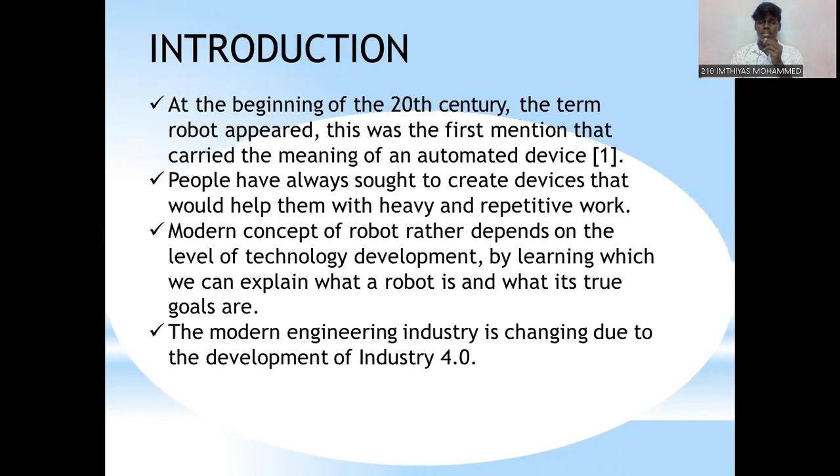The modern engineering industry is changing due to the development of Industry 4.0, and modern robotics production has moved beyond separate work areas and started working together with humans. There is a new type of robot, collaborative robots, that can work side by side with a human, performing not only sequential tasks but also parallel ones. Cobots have the following characteristics: ability to interact safely with a human, risk reduction in task implementation, and flexibility with learning possibility for wide use and quick adjustment. Through the integration of collaborative robotics in production, it becomes possible to advance from coexistence to collaboration between workers and robots.

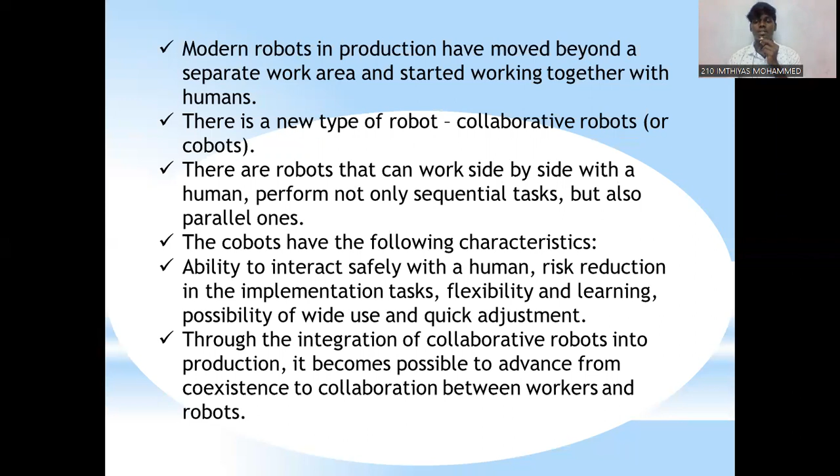In this slide, we see the robotic classification. First of all, there are two types of classification: service and industrial. The service type is personal, professional, and industrial professional. The two in collaboration are called collaborative robots.

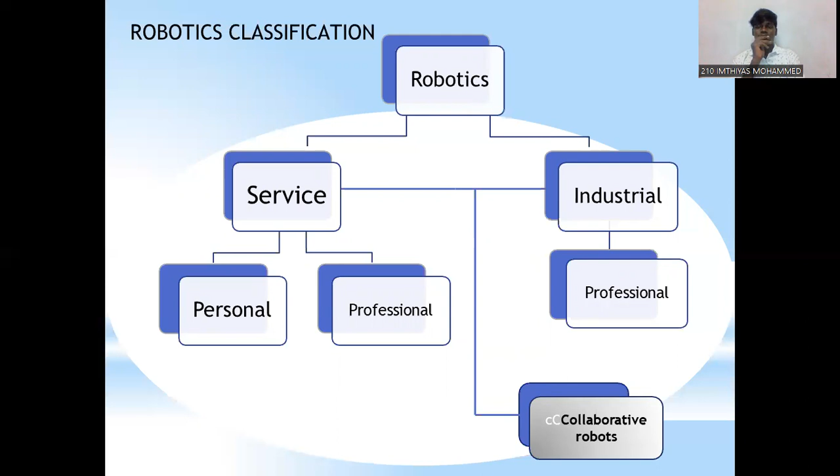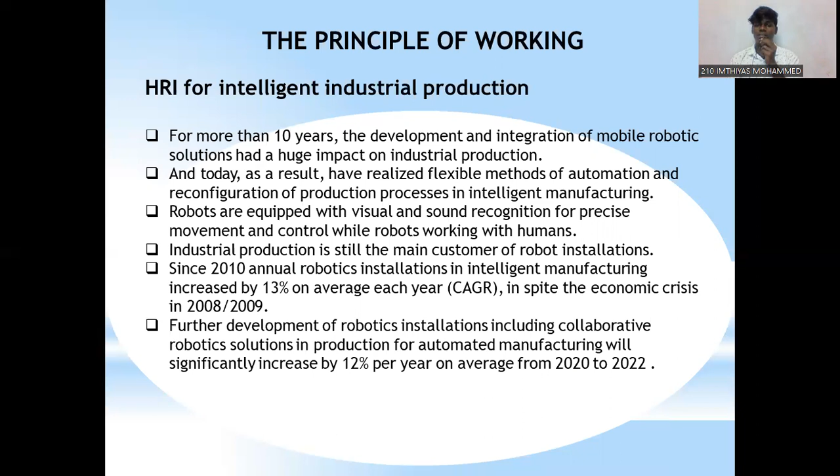Then HRI for intelligent industrial production. For more than 10 years, the development and integration of mobile robotics solutions has had a huge impact on industrial production. Today, as a result, we have a flexible method of automation and reconfiguration of production processes in intelligent manufacturing. Robots are equipped with visual and sound recognition for precise movement and control while working with humans. In further development, robotic installations including collaborative robotics and solutions in production for automated manufacturing will significantly increase by 12% per year.

Next, collaborative robot safety oriented method during HRC. This section describes safety in HRC, with examples such as robot and human in the field of rehabilitation, human and autonomous vehicle on the road, child and robot during study, manipulator, and human worker in a robotic lane in production.

There are two ways to reach safe interaction between robots and humans. First, changing the robot configuration so that it does not cause any harm when it collides with humans, which is basically hardware design. Second is to make a collaborative robot based on safety standards and software design.

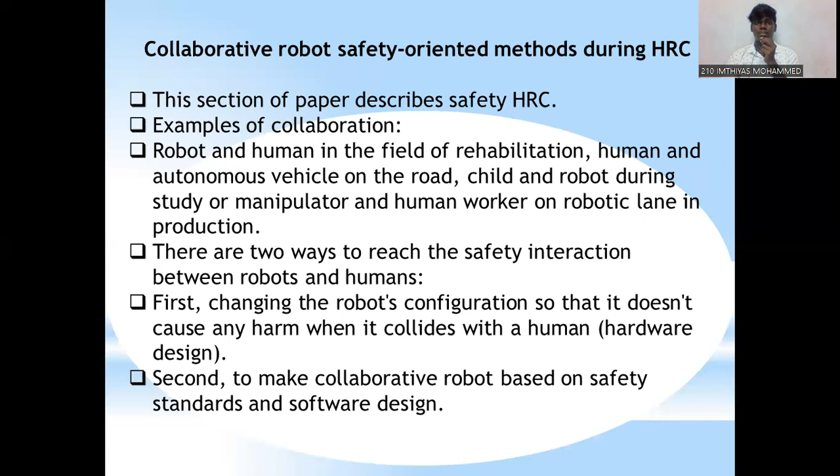Consider a multi-agent system, where each element is defined as a robot agent or human agent. For safe and effective interaction between a human and robot, it is advisable to use the method for solving tasks in game theory, with active agents whose actions are mutually determined in relation to each other. The goal is designed to find the bounds of robotic action which are safe for the human and back reaction, and to maximize the robot's utility or minimize the robot's cost within those bounds.

There are three main factors important to cobots. First, improving the economic efficiency of robots in relation to human labor. Next, introduction of technical advantages in robotic solutions which will allow effective implementation of robots in key industry and economy. Another one is the rapid development of the robotic market.

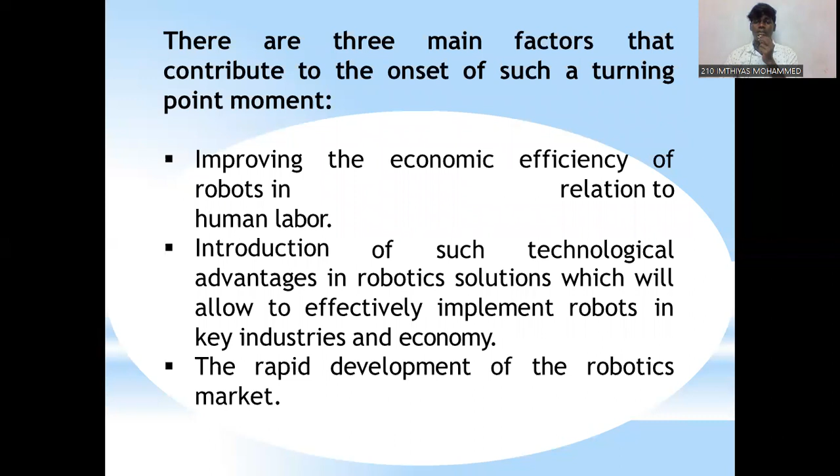The collaborative implementation examples show that automation and implementation of HRCs in series production is a major step toward future intelligent manufacturing. It becomes cheaper, more flexible, and efficient. One of the unique opportunities of cobots is the cognitive ability to take decisions independently.

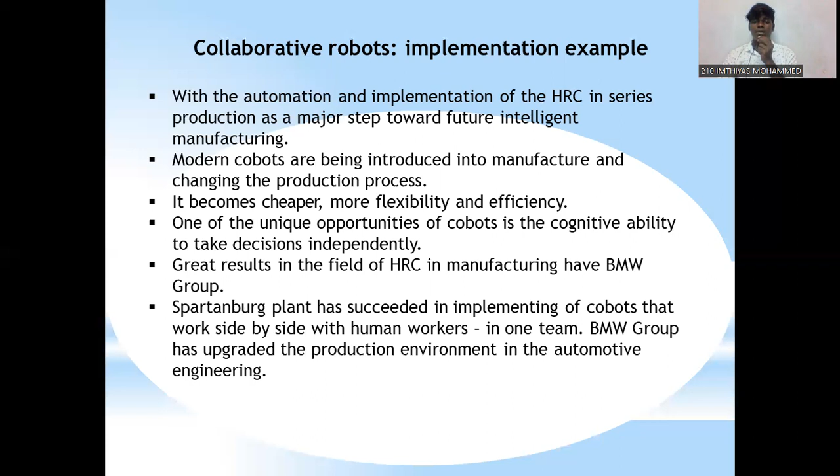Great results in the field of HRC in manufacturing have come from BMW Group. Their Spartanburg plant has succeeded in implementing cobots that work side by side with human workers. BMW Group has upgraded the production environment in automotive engineering, allowing human operators to use their cognitive abilities to maximum effect. Human operators can work together with robots without productive difference, improving efficiency and effectiveness at the workplace, with more room for creativity.

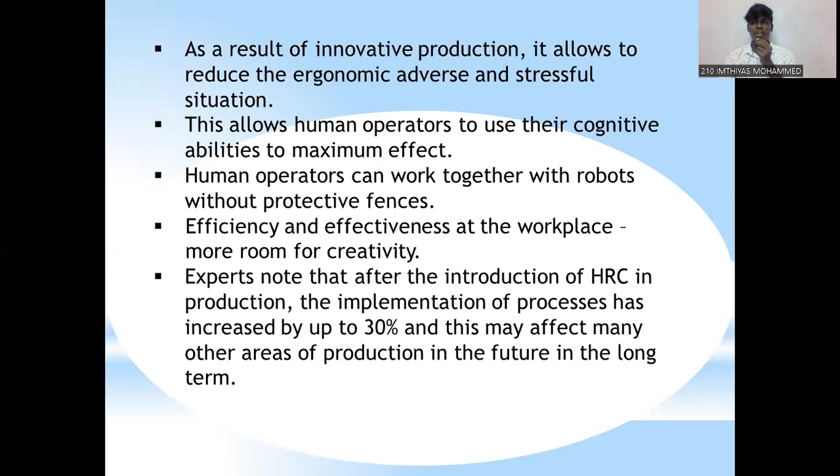The main human factors during HRC are displayed as follows. First, the credibility of the robots - the lack of confidential relation with robots and the attitudes toward them contribute to reduction in their use.

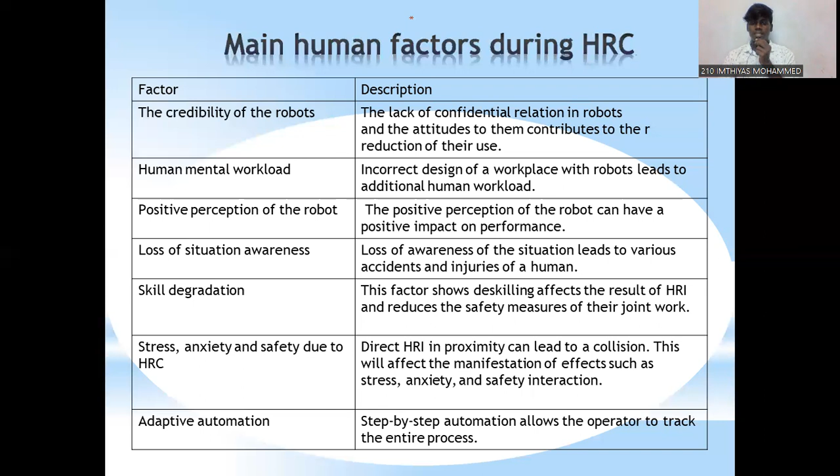And human mental workload - the incorrect design of the workplace with robots leads to additional human workload. Positive perception of the robot can have a positive impact on performance. The loss of awareness of the situation leads to various accidents and injuries of a human. Skill degradation affects the result of HRI and reduces the safety measures of joint work. And adaptive automation - the step-by-step automation allows the operator to track the entire process.

This is the Cobot robot. There are many applications of the Cobot robot, including assembly, dispensing, finishing, machine tending, material handling, welding, material removal, quality inspection, and more.

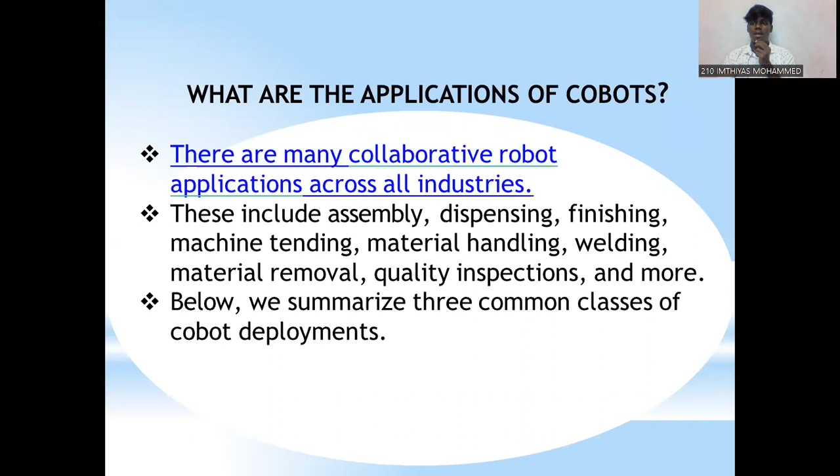Below we summarize three common classes of Cobot deployments. Material handling is one of the most dangerous jobs in manufacturing. Materials such as metal, plastic, and other substances can pose a great risk to human workers. Additionally, many material handling tasks are repetitive, which can give rise to repetitive strain injury. Industries that use robots in manufacturing see significantly fewer workplace injuries.

Meanwhile, machine tending tasks, including those that involve heavy duty CNC machines, are also within the capabilities of Universal Robots' cobots.

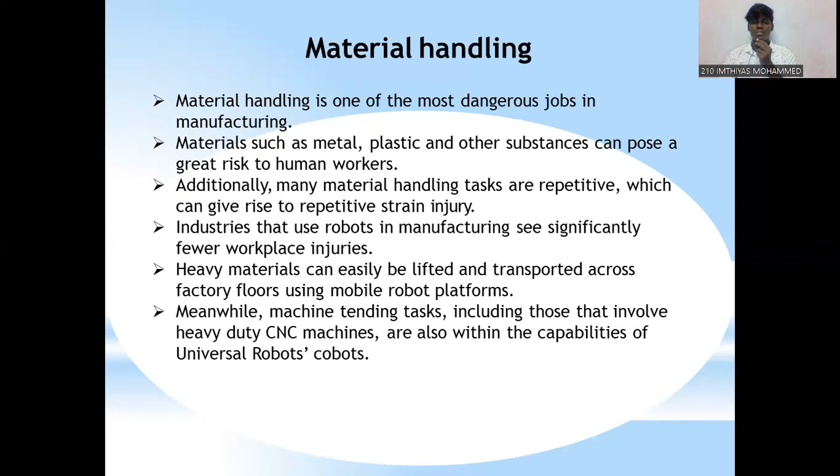For assembly and quality assurance, Universal Robots' cobots are specifically designed to work alongside human employees and relieve them from tedious and difficult assembly jobs. This includes welding small pieces together, drilling screws, and similar assembly tasks. Cobots can also be used to assist with quality assurance during the production process.

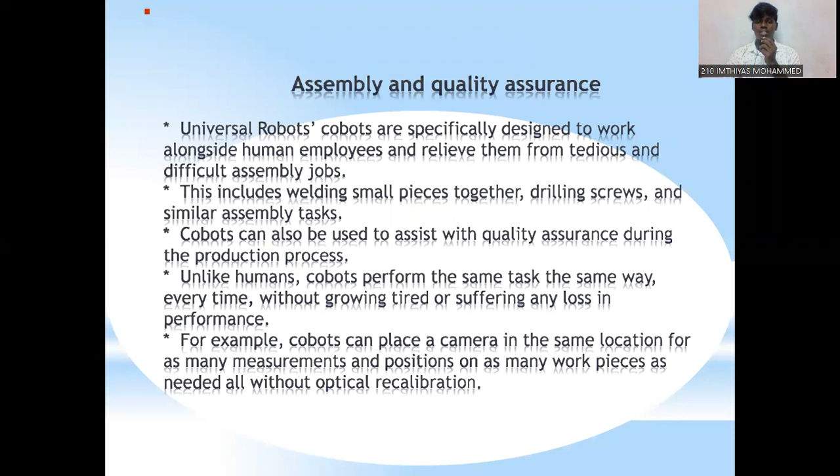Unlike humans, cobots perform the same task the same way every time without growing tired or suffering any loss in performance. For example, a cobot can place a camera in the same location for as many measurements and positions on as many workpieces as needed, all without optical recalibration.

Next, material removal. Other production tasks can also be handled by cobots. Material removal by robots is needed for any process involving filling molds. Small robots can assess the molded piece and take care of trimming any excess metal or plastic without damaging the part or subjecting human workers to the risk of injury.

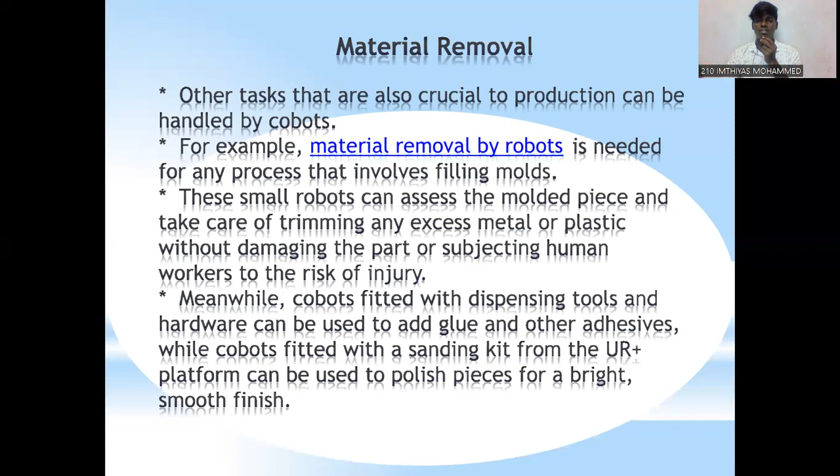Some common uses of robotic technology include electrical and electronics, food and agriculture, and pharmaceuticals and chemicals. In electrical technologies, universal robots are used in manufacturing of lighting, mobile phones, speakers, computers, and more useful works.

Collaborative robots are easier to program than typical industry robots. They can be operated by non-experts and are preferred for fast implementation.

Next, food and agriculture. Food and agriculture production takes place around the clock, and robots are able to work 24 hours a day, which leads to less waste and faster production time compared to human labor alone. Additionally, robots can operate in extremely hot, cold, or unpleasant conditions. As a result, more companies in the food production sector are turning to cobots to support human labor.

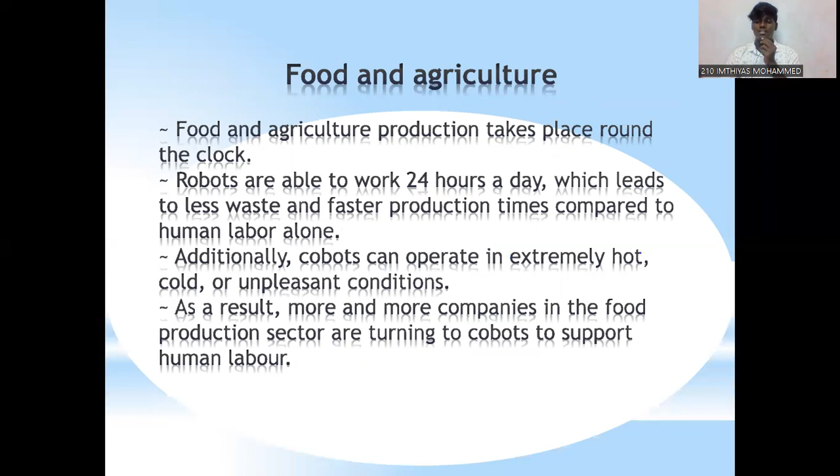Next, pharmaceuticals and chemicals. The production of pharmaceutical chemicals and medical equipment requires the utmost precision. UR cobots are regularly used to mix, count, and dispense a variety of materials.

The Copenhagen University Hospital in Denmark uses UR cobots in their lab to optimize the handling and sorting of blood samples for analysis. The solution has enabled the lab to maintain its target of delivering more than 90% of results within the hour.

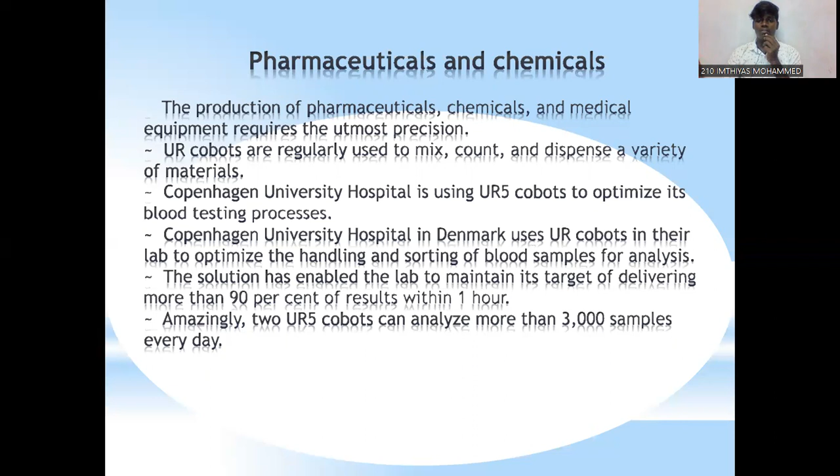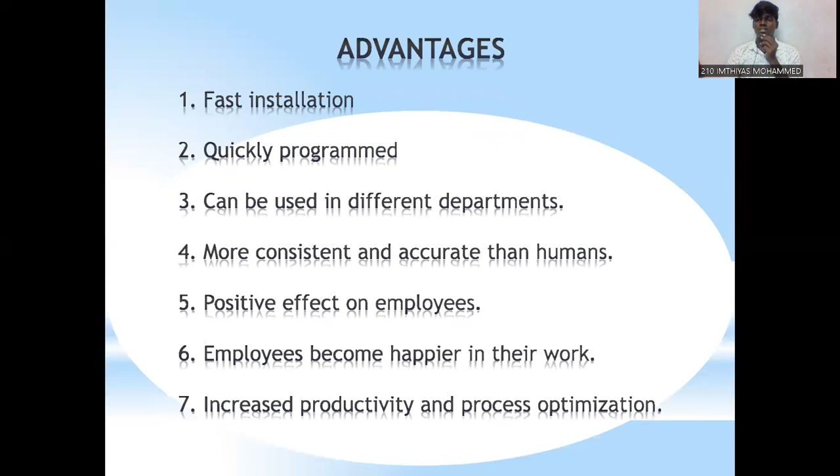Some advantages of these robots: fast installation, quick programming, can be used in different departments, more consistent and accurate than humans, positive effect on employees who become happier at work, and increased productivity and process optimization. Disadvantages are that the speed is limited and might not be as efficient as six-axis robots.

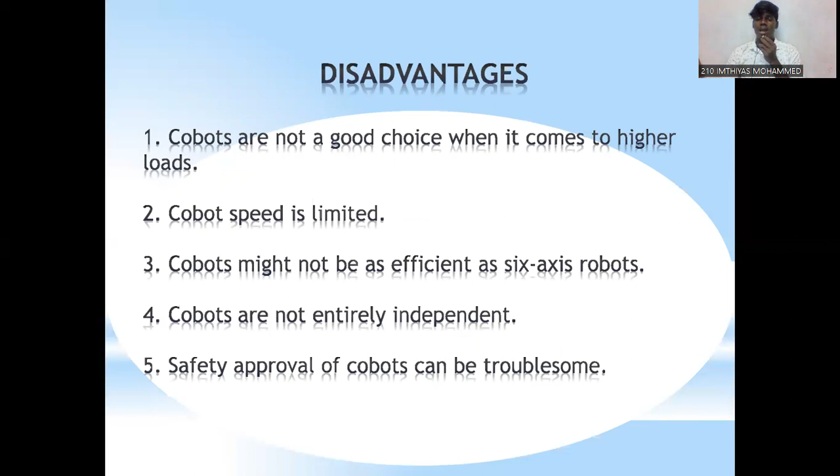Also, they are not entirely independent, and safety approval for cobots can be troublesome.

Finally, the conclusion is cobots, as an element of the future of robotic processes, have become safer and more efficient. They can perform various tasks, and configuration and programming processes have become possible at the workplace in real time.

The global demand for cobots is growing every year. In the future, cobots will become the main tool of the production process in industry. This will help optimize the process, reduce production costs, and increase productivity.

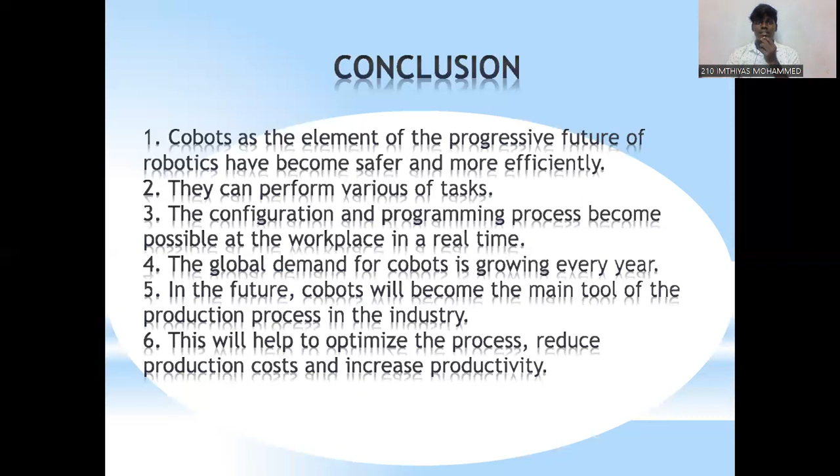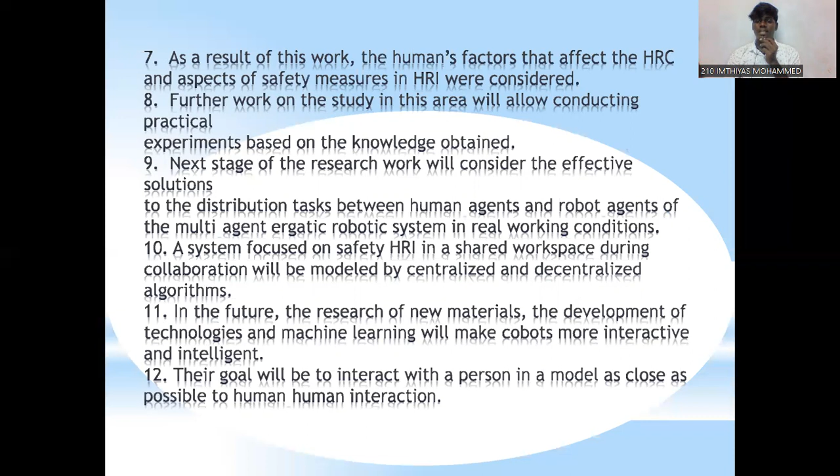Further work in this area will allow conducting practical experiments based on the knowledge obtained, and the next stage of research will consider effective solutions. A system focused on safe human-robot interaction in a shared workplace during collaboration will be modeled using centralized and decentralized algorithms. Their goal will be to interact with a person in a manner as close as possible to human interaction. Thank you.